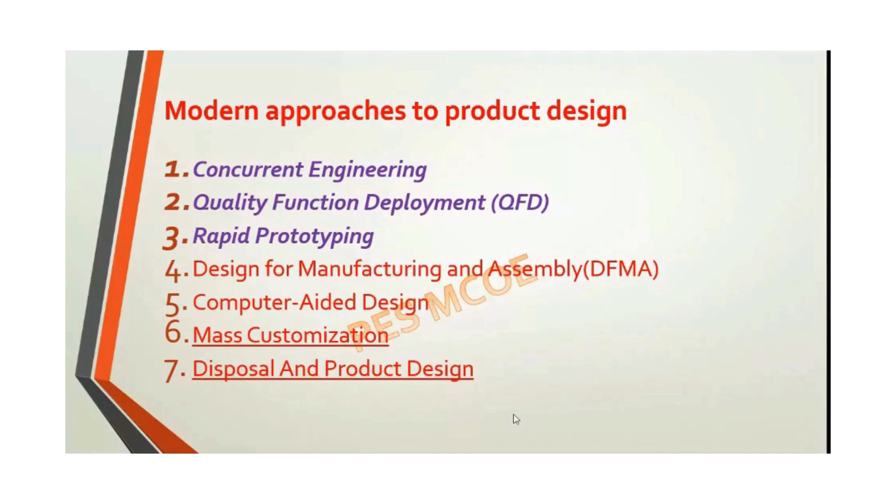What are the different or modern approaches in product design? Basically, the first three approaches for your study are concurrent engineering, quality function deployment, which is also called house of quality, and rapid prototyping. We'll go one by one.

So quality function deployment, or house of quality, was first introduced by Mitsubishi, the well-known manufacturer of cars or automobiles, in Japan in 1972. Quality function deployment is basically a method of structuring customer requirements, whatever customer requirements are there, and expressing them in terms

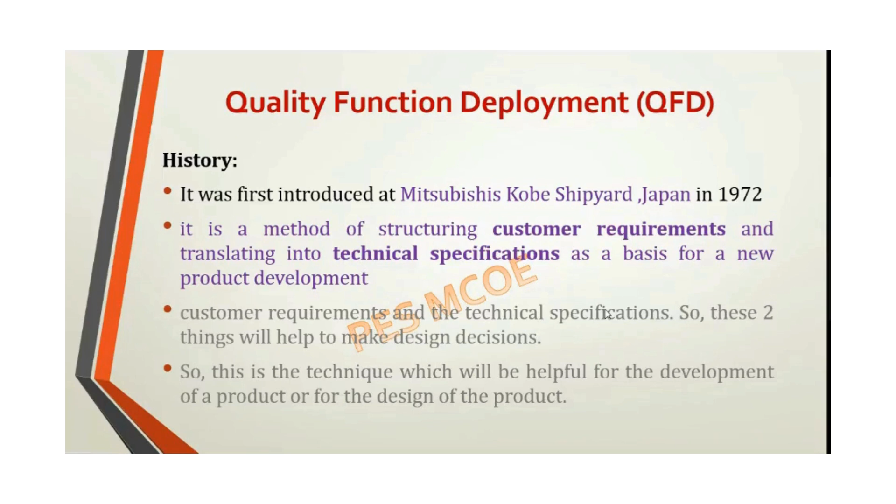QFD is a method of structuring product planning and development that enables the developer to specify clearly what the customer wants or needs. For example, you need a 4-seater vehicle. So what should the BHP be, what should the efficiency be, what safety features should be in the car, what should the drive type be, manual or automatic. Those are the needs of the customer for the 4-wheeler, and you need to convert them into technical specifications.

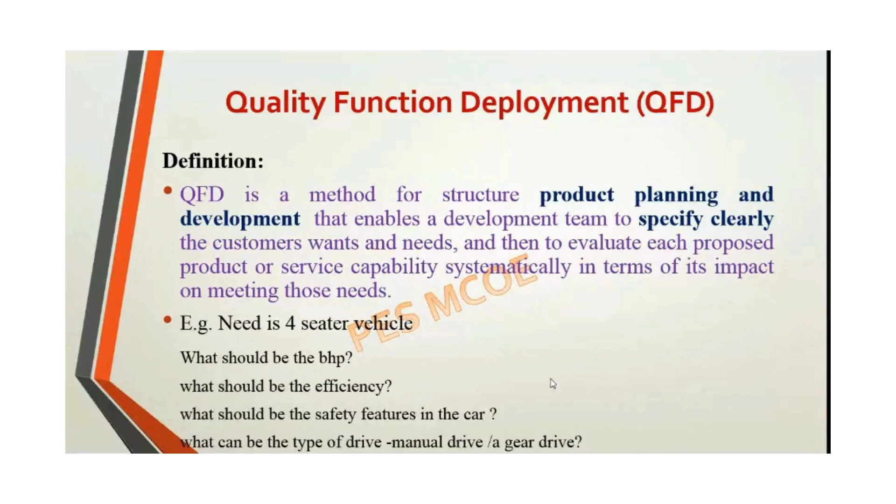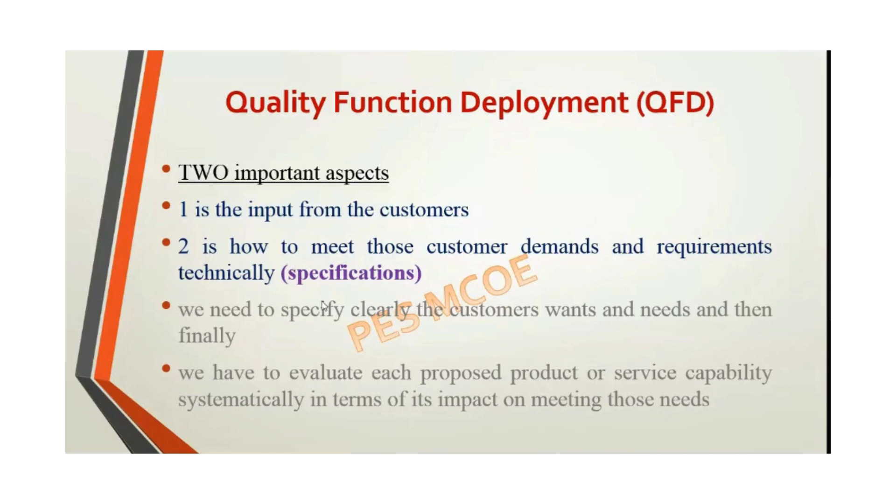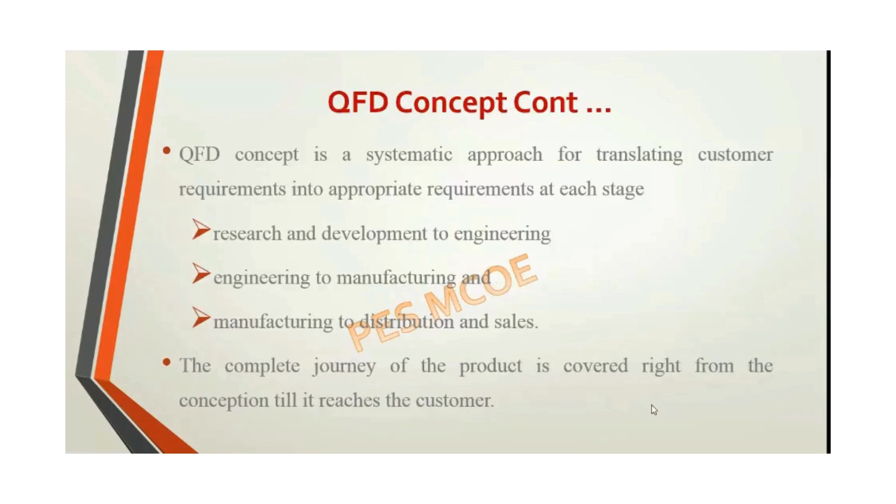With the help of some product planning or development. So, 2 important aspects. One is input from the customer, that is the customer needs or customer requirements. Second is how to meet those customer demands or requirements technically, so that is the technical specification. And QFD, quality function deployment, is also called a house of quality. Why? Because you are representing it in

matrix form. And this correlation matrix has a dome shape or triangular region, so it looks like a house. That's why it is also called house of quality. So voice of customer, that is the needs of the customer, and you have technical specifications here, which can be related with a relationship matrix.

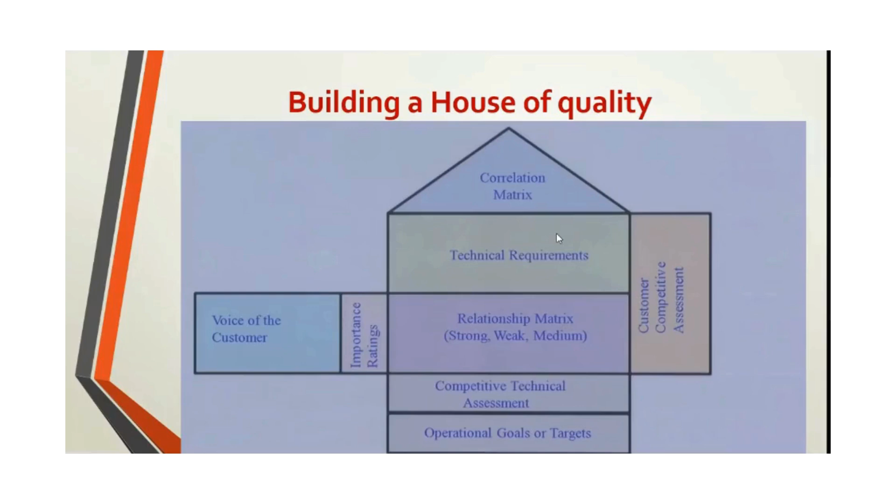You also have competitive products and competitors, so you have some competitive study. Operational goals and targets and customer competitive assessment are done, and the relationship matrix is a relation between the technical specifications and what the customer needs. So this is the house of quality. Let's go again.

There is a customer matrix. Every row or column indicates a matrix in the house of quality. The horizontal part, which is the customer needs, here you have technical specification and customer assessment; the horizontal part of the house of quality is the customer matrix. So keep this in mind. You may get a question on house of quality or quality function deployment. Here you can observe the customer requirements.

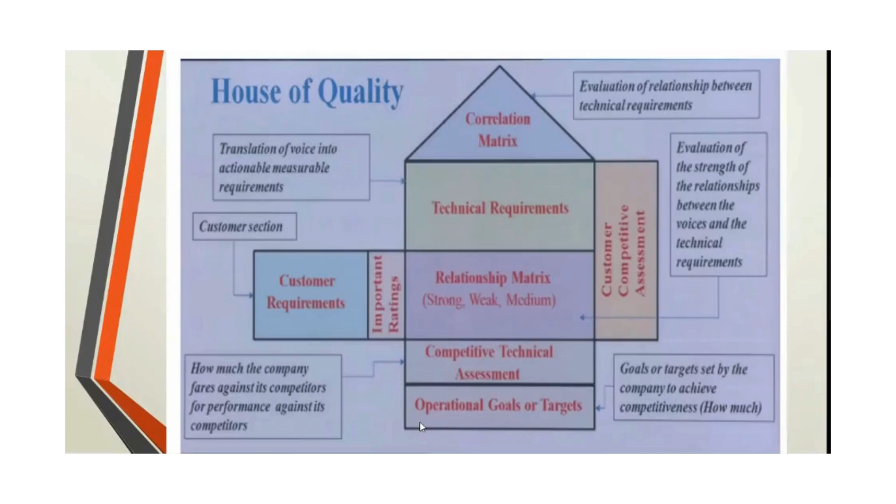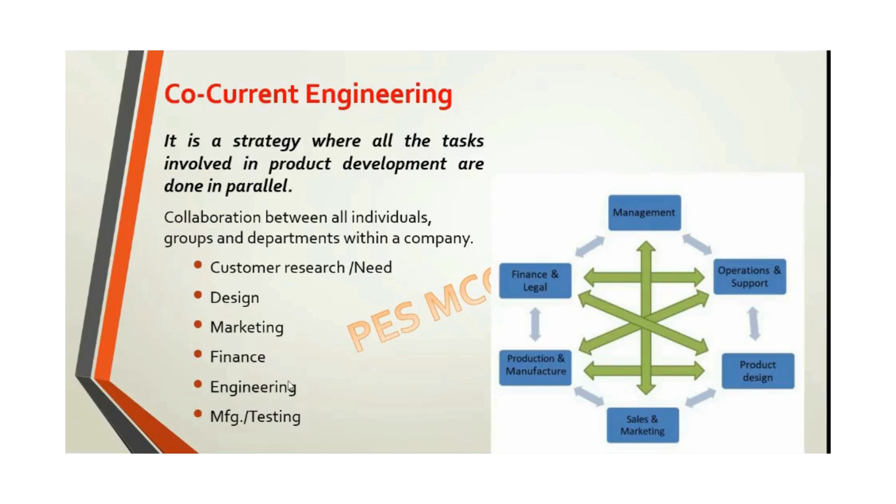Then concurrent engineering. So this is a simultaneous process you have come across again in design. So it is a strategy where all the tasks involved in product development are done in parallel. Okay, customer research असेल, designing असेल, marketing असेल, finance असेल, engineering असेल किंवा manufacturing or testing असेल. Initially, suppose this is a traditional process which is a linear one. Customer have a different, then you have some designer, you have some analyzer, you have manufacturing.

But in concurrent engineering, every member from the team comes together and works on the same problem. So whatever obstacles or big walls are there, they are broken down, and the whole team comes together to solve the problem. Okay, in the conventional one, again, a linear process is there.

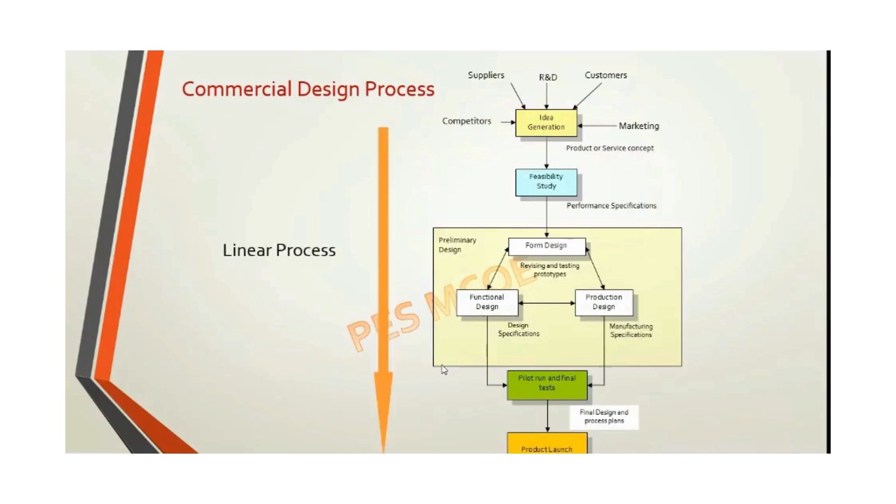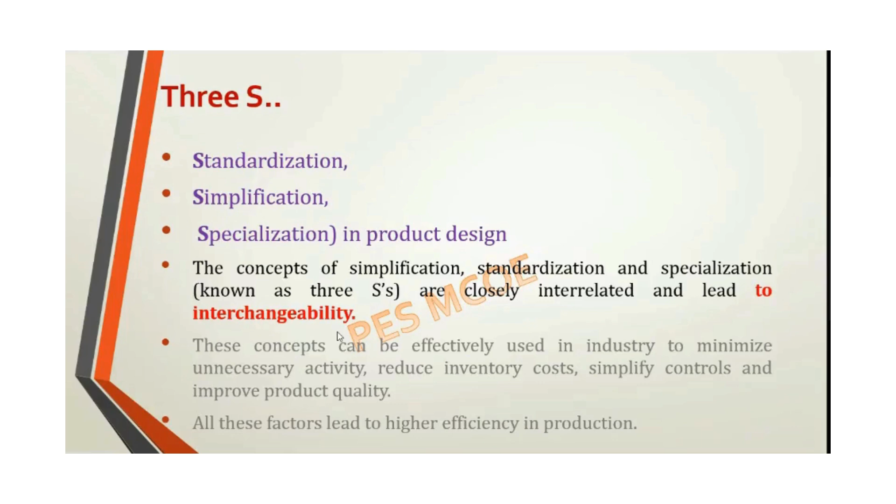Then the next concept: standardization, simplification, and specialization in the product design. What do you mean by that? Okay, so that leads to interchangeability. So keep in mind that word. All these concepts are used for the interchangeability purpose in the product. Standardization is what? The process of establishing the basic specification for a set of commonly used characteristics, that is size, shape, and performance of the product.

Now in design you have gone through some preferred series. So that is the result of standardization, right? You get certain standards, or suppose you require an M20 bolt which is manufactured by n number of companies. While you are going to market, you are asking for the M20 nut or bolt. So you will only get M20, right? M20 साठी तुम्हाला ह्या प्रोडक्टचे वेगळे डायमेन्शन नाही आहेत, right? So the size, shape and performance parameters of the products are there.

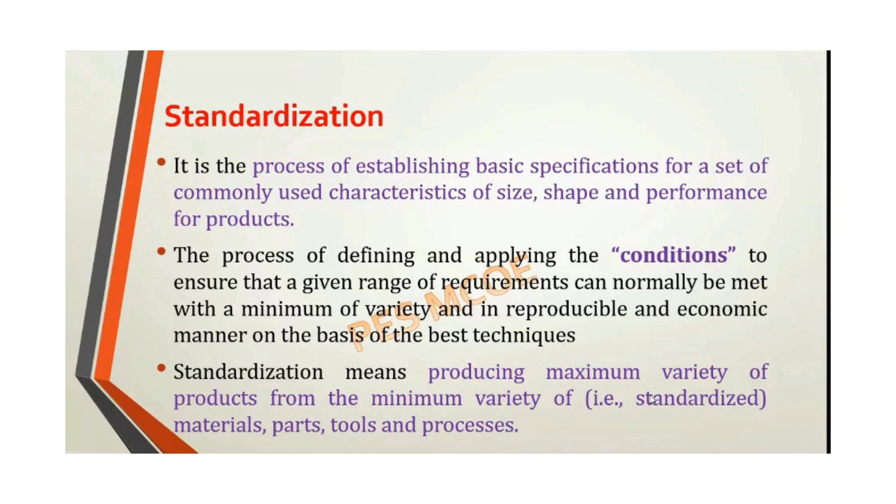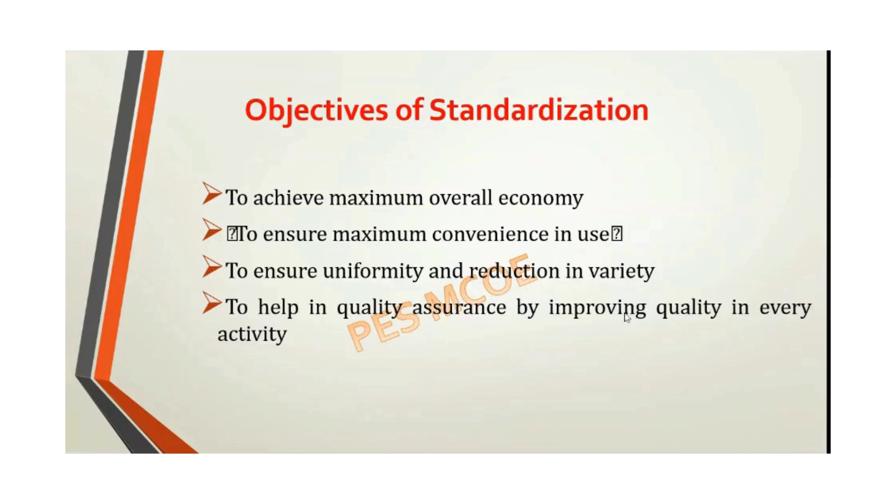That is the standardization. So producing maximum variety of the product from the minimum variety, that is the material part, tool, or process. The objective of standardization is to achieve maximum overall economy for the company, to ensure maximum convenience in use, to ensure uniformity and reduction of variety of the product, and help quality assurance by improving the quality in every activity. Simplification is what? The concept is closely related to standardization. It is a process of reducing the variety of the product which will be manufactured.

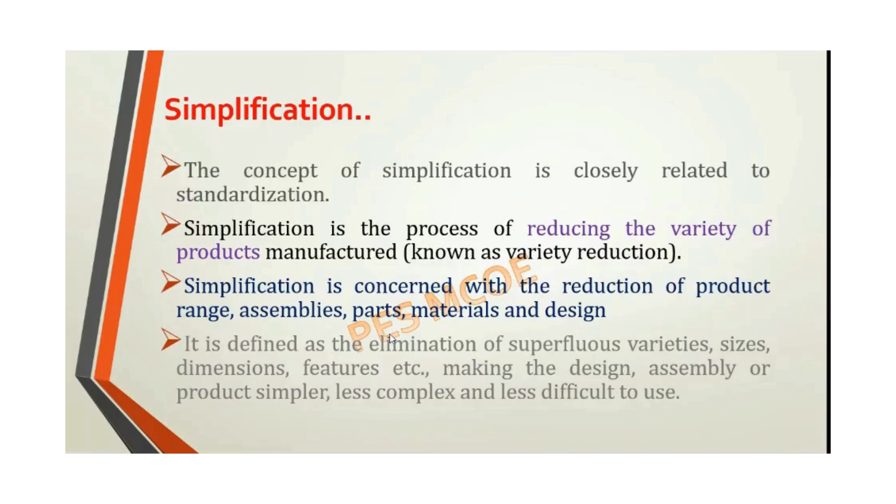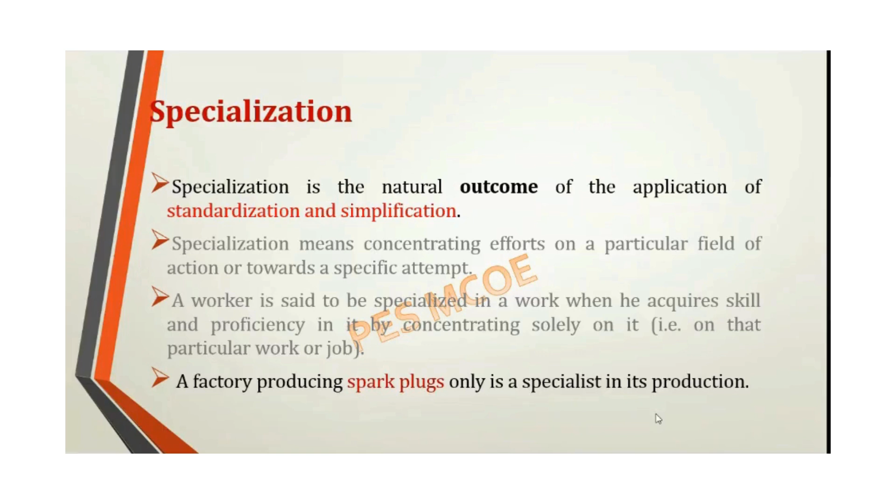Okay, and specialization, it is the outcome of standardization and simplification. That is, the factory producing the spark plug is only specialized in that product. Example घेतलं तुम्ही, bearing. So that factory, that company has its own standard and they specialize in producing the ball bearings. Okay, then what is product development actually? Product development, as already told, is a continuous process. So 7 stages are mainly important:

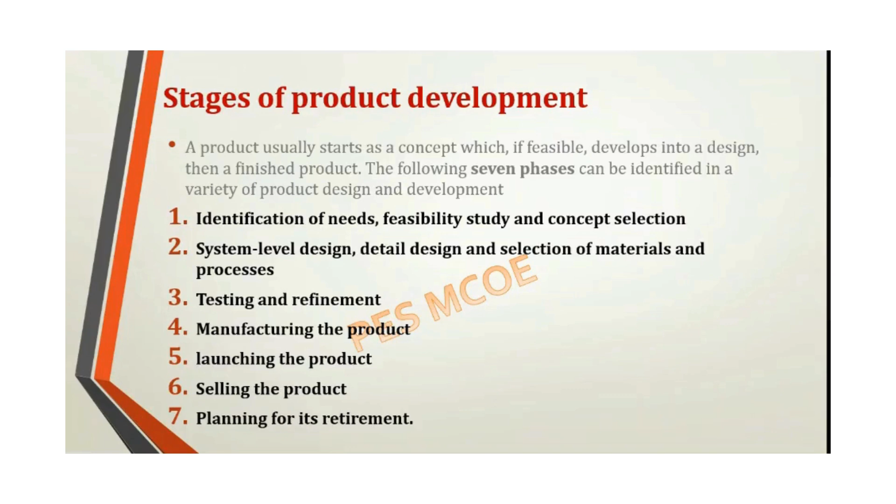identification of need, then system-level testing and refinement, manufacturing of the product, launching, selling and planning for the retirement. So planning for the retirement ज्यावेळी तुम्ही करता, then you are going through new product launching, and that will also come under the S curve. Product design is the process involved mostly in the technical work, and product development includes the complete product development cycle.

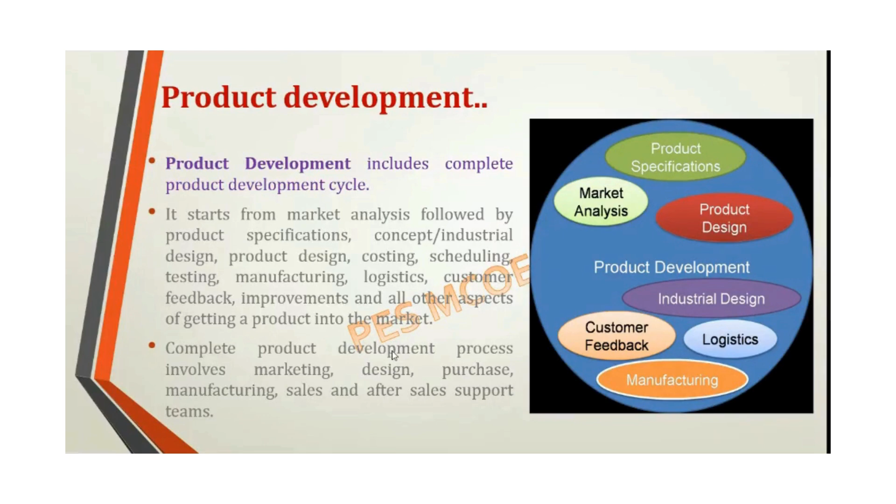Product testing: so you have done quality testing or performance testing for the product.